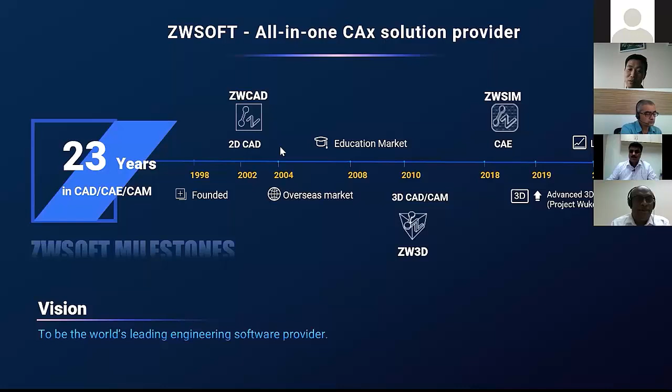This year is a very important year for ZWSOFT. We got our IPO successfully as the first listed and biggest engineering software provider in China. We are planning and working on some bigger and faster development steps after this year, like our new project called Wukong, which is related to BIM. I will share a little more information after this page.

So here I would like to show you some statistics of the ZWSOFT organization to give you an overview of our team. ZWSOFT is the biggest engineering software company in China, and also one of the few CAD/CAM/CAE providers with all technical kernel technology in the world. As an international company with headquarters in China, we now have 8 branch offices in China, the US, Vietnam, and more overseas local offices coming.

In total, we have more than 1,000 employees today, and I want you to pay attention to this: among our 1,000 employees, 50% of them are pure engineers from the R&D department. In total we have 6 R&D centers, 5 in China and 1 R&D center in the USA.

You can find from ZWSOFT's financial report that we keep spending more than 30% of our revenue on R&D every year. Such a high percentage of R&D spending is much higher than most other technology companies, even Huawei in China. That's also why we can keep improving good products and support to meet the needs and satisfaction of our customers, and of course you can also get good support.

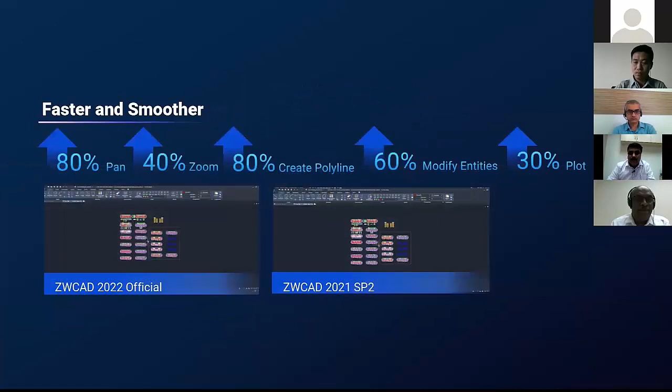Now let's look at a performance comparison between ZWCAD 2022 and ZWCAD 2021. You can see how much faster and smoother it is than before, for actions like zoom in, zoom out, creating polylines, modifying entities, and so on. The best way to experience the speed of ZWCAD is, for example, opening an existing file—you can see the difference significantly.

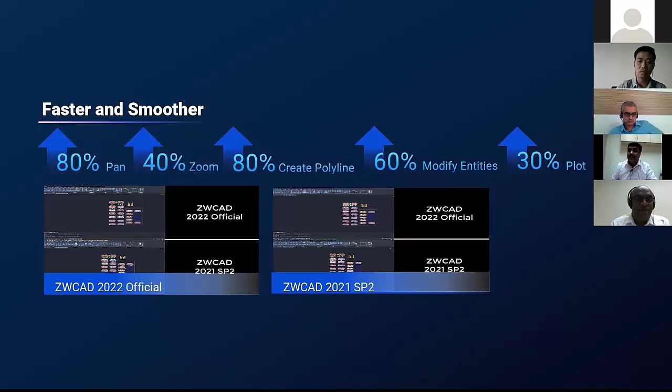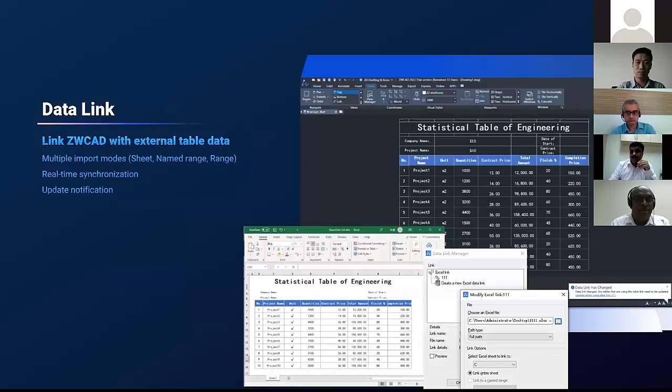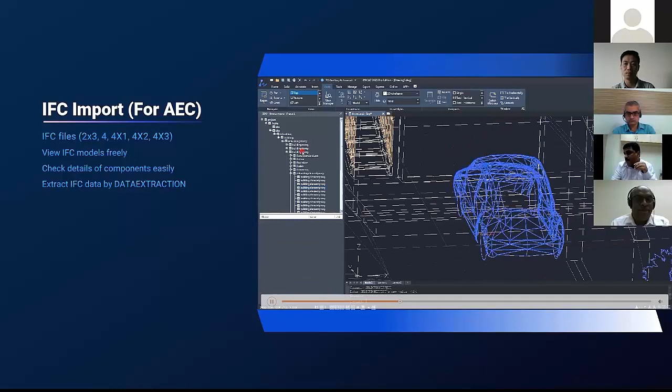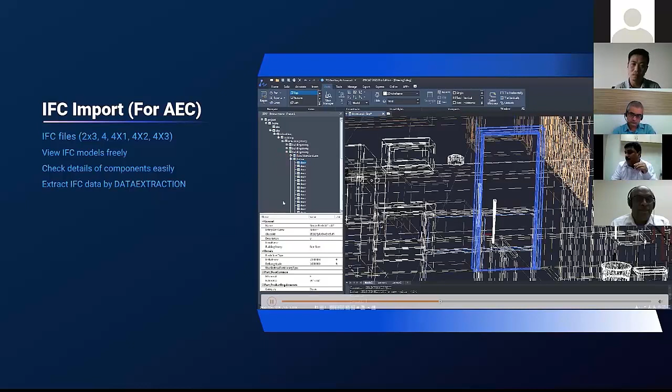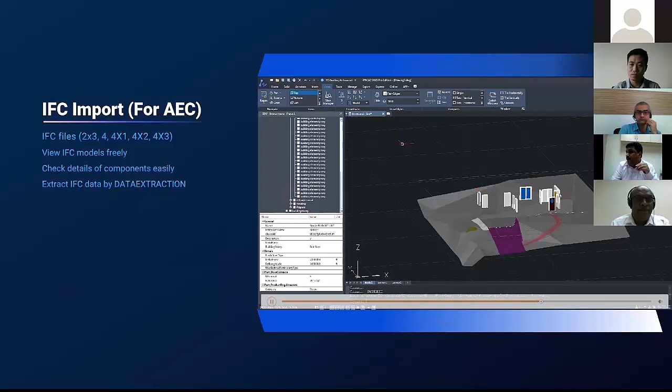Now let's look at data import, like IFC import, which is important in the BIM industry. You can import an IFC file and view the IFC data. In the IFC data, you can see full detail about the structure—what kind of details the IFC data has—all visible in the structural panel. You can identify building details and other IFC properties in the IFC structural panel, along with a whole bunch of product details. Next is visualization—once you import the IFC file, you can visualize all the details needed from the IFC data, and use this to cross-check your design.

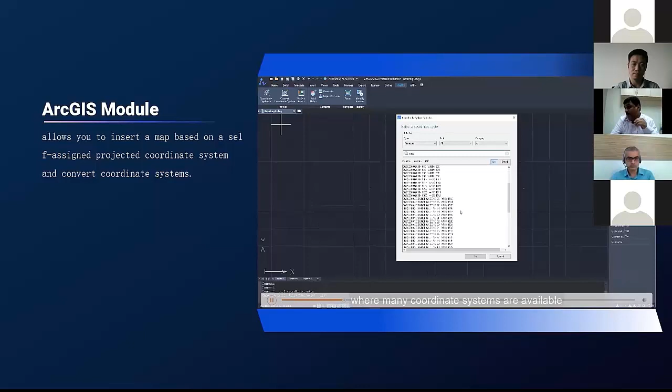Next is ArcGIS, an add-on module you can add in ZWCAD 2022 SP1. Here you can load your GIS data and convert it into the coordinate system properties. Let's see how you can assign the coordinate system in three different ways. First, you can assign the coordinate system using your existing references, selecting it as per your coordinate system value. Second, you can choose your project details in ArcGIS. Third, you can assign your current drawing using ArcGIS properties, and also assign the current drawing using ArcGIS data coordinate system.

Next is Flatshot. With Flatshot, you can convert a 3D model into a 2D drawing. For example, you can see the model from other views like top view and front view—you can take this data from the 3D model. This feature creates geometry from the 3D model using different axes, such as top view, front view, side view, and isometric view.

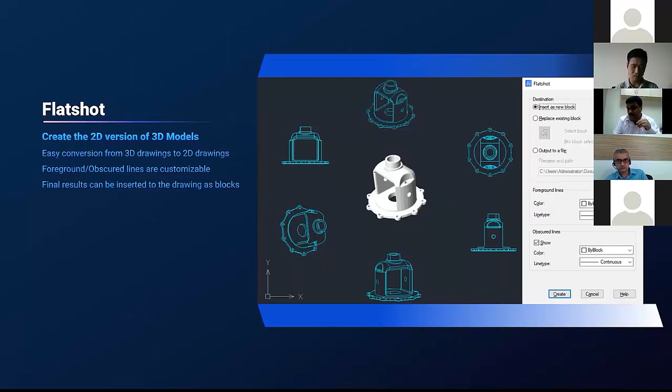Next is plot transparency, now available in ZWCAD 2022. If you want more varied graphic effects or a better representation of overlapping objects, don't miss this plot transparency feature.

Now come to the new licensing system. This is the window about the old licensing system, the 2021 license manager. In the new licensing system, there is the efficient license manager with added new user interface and more convenient way of activation, like offline activation using QR code. You can scan it offline through your mobile app, and you can manage all licenses in a single panel.

Next, the new features in ZWCAD. Adjustable viewport is convenient for viewport adjustment, and you can resize your viewports. And anti-aliasing switch is for smoothness of your curvature, which you can use in the option menu.

Then measure property. Measure property is a new tool. You can measure the distance, radius, area, and mass property. In one single command, you can measure a whole bunch of details.

Other improvements include plot transparency. You can apply plot transparency on your model space or while printing, so you can showcase the underneath design through the plot transparency. Updated data extraction: now text is added in the data extraction part. And mLeader: you can add mLeader in the right click menu, giving flexibility to add leaders. Then movable layer property: you can move your layer property side by side, or conveniently move whichever property you require.

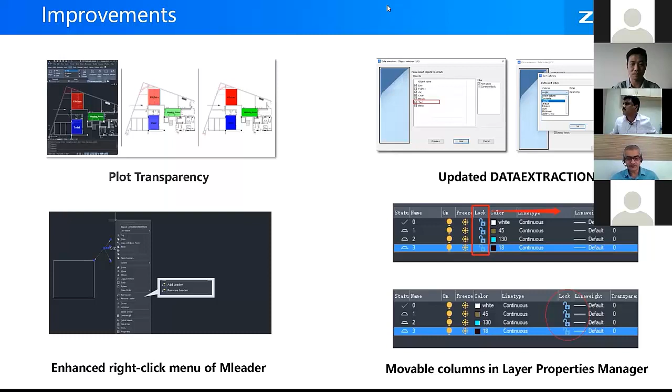Good afternoon everyone. My name is Rakesh Rao, and I am from Four Dimension Technologies. We are developers of add-on products for ZWCAD. We have produced many software like CADPower, GeoTools, and also done a lot of custom programming. So let me start with GeoTools today.

Let me just go to the screen. Are you able to see my screen? Yes. Yes, yes.

Okay, so this presentation is about a small add-on product called GeoTools, which runs on ZWCAD very efficiently. First of all, I would like to introduce and define what GeoTools is, and what the objective of this product is, because sometimes there is confusion. People don't know—geo obviously means geographic data, but beyond that they don't know whether it is geography, survey, or GIS.

So we define GeoTools as a geographic data productivity software. This means if you're using just ZWCAD, you may only have a certain number of general tools for your daily work, but with GeoTools we make it more easy and more productive. So primarily it's useful for anyone who is using geographic data, mainly industries like infrastructure, surveying, mapping, oil and gas, mining, civil, road design, facilities management, and so on.

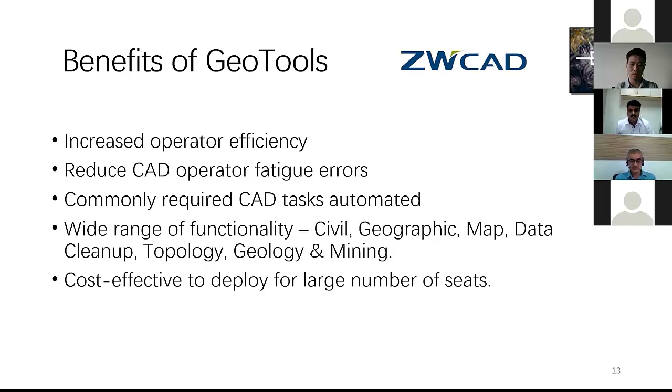Now these are some of the screenshots. I will be showing you 4 or 5 such screenshots, and then we move directly to the software live demo.

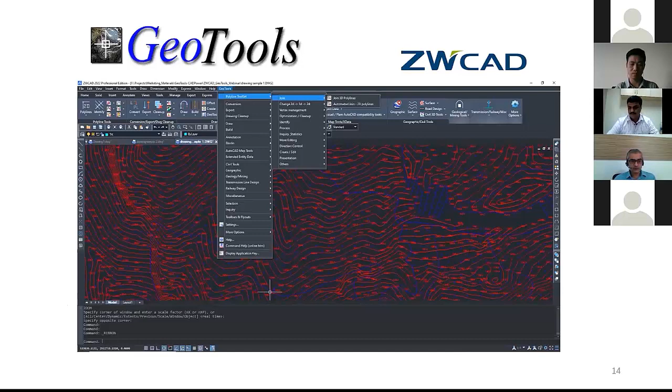Once you install GeoTools on ZWCAD, the GeoTools menu will appear at the end as a pull-down menu. It will also appear as a ribbon. It will also be accessible as a toolbar, and finally you can also run it from the command line. So all this I will show in the demo. Very easy to understand and use.

So you're seeing here the GeoTools Polyline toolset. The entire tools are classified into different categories. You can see already here Polyline, Conversion, Export, and so on. So for example, these are the conversion tools, and these are the export tools. These are annotation tools, civil tools.

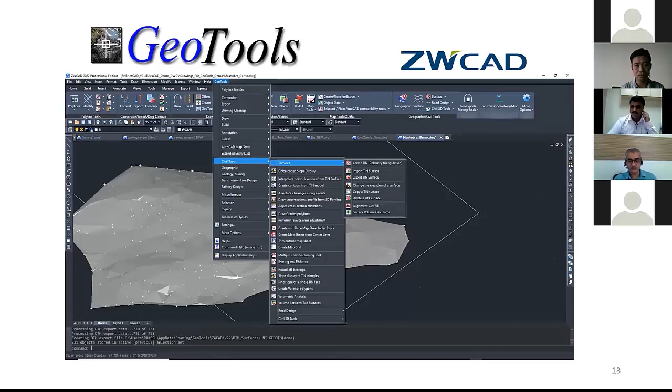Civil tools is probably the closest you can get to a software like Civil 3D. We have all the tools for contours, terrain modeling, slope analysis, color-coded maps, grading, polylines, trimming, sheet generation, all those things. So the tools can be classified both for design as well as for map generation and layout preparation and so on.

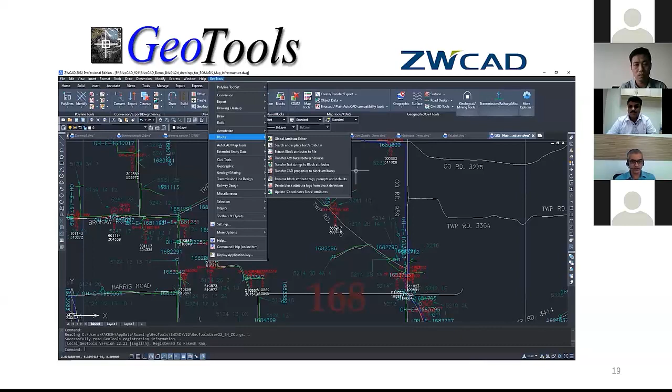Then we have tools for block management, like various advanced tools for attributes - globally modify the attributes, transfer attributes from one block to another, or transfer the data from polyline to attribute, attribute to polyline, and all that. Again, you will see that in the live demo.

Then here is the build tools, and then we have the draw tools here. And then we have a special section called geology and mining. This is an add-on to GeoTools. GeoTools itself is an add-on to ZWCAD. Geology and mining tools are a specific, separately priced add-on which are very useful for mining and geological consultants.

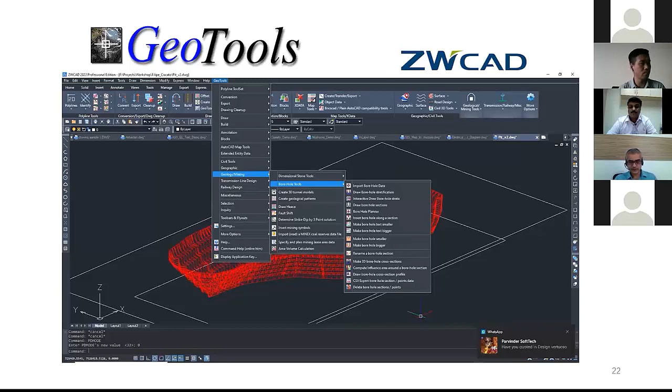Here we offer some of the basic functionality required by mining people, like creating boreholes, creating benches, creating rose diagrams and so on. I will also be briefly showing you that, just about maybe 1 minute, because this is only for a very specialized industry. So this is an example of output from the mining.

Okay, so that was the PPT. I don't want to show too much of PPT. It is better that we see the product live.

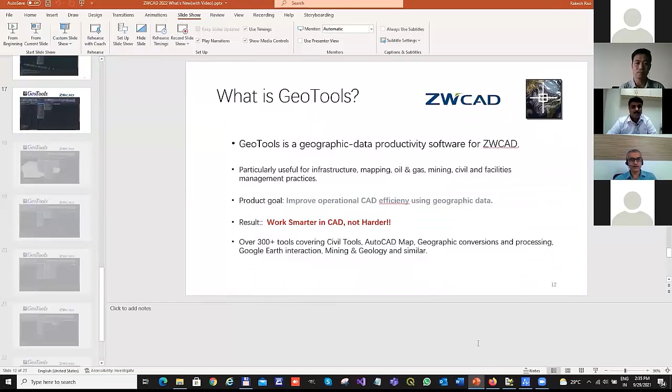Okay, how do I move this to the top? Yeah.

How do I move the zoom window to the top? It's blocking my toolbar. Yeah, I can see your screen now. Yes, we can hear you also. No, I'm trying to move it to the top. Okay, no problem, I'll just move it.

We can see now, yes, GeoTools is running on ZWCAD 2022. Got it. So this is how it looks.

Like I said, we have the GeoTools pull-down menu here, and under this we have different options like Polyline. So all the Polyline tools are shown here, and you can see they're very logically organized. Under Polyline tools, if you come to Join, we have Join 3D Polylines and Automated Join for 2D Polylines. And under Polyline, we have Change 2D to 3D, 3D to 2D, so here also you have different options.

I just clicked on one of them, and you can see if you want to convert a 3D polyline to 2D polyline, these are the different options, like change to 0, lowest Z, highest Z, and so on. What I mean to say is there are multiple options for each command which you can use.

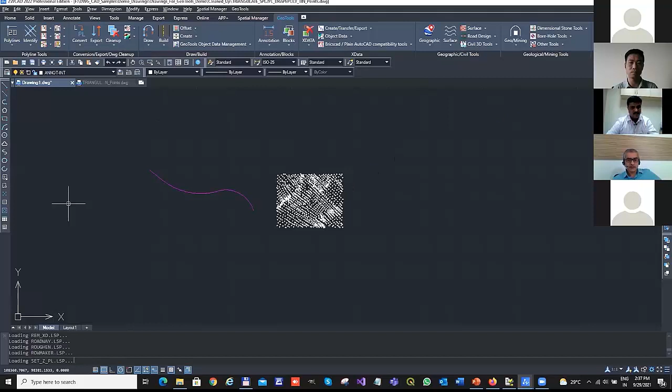So let me now open some drawings and show you how you can do this. For example, we're going to open this drawing here. I'm going to start with some basic civil tools. Right now here I have a set of points.

You can see these are a set of points, and I'm going to now create a 3D DTM, or digital terrain model, out of this. So I go to GeoTools, then Civil Tools, then Surfaces, and I create TIN. TIN is also known as Delaunay Triangulation.

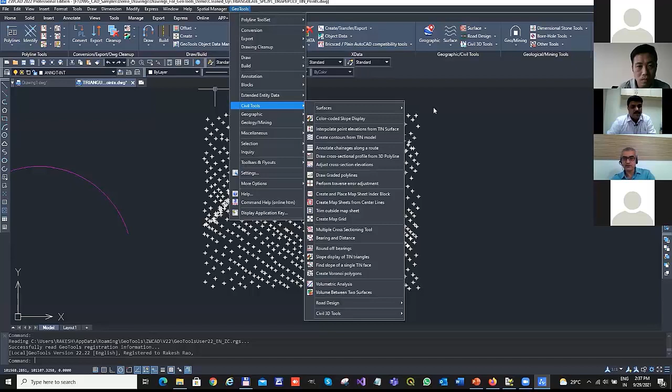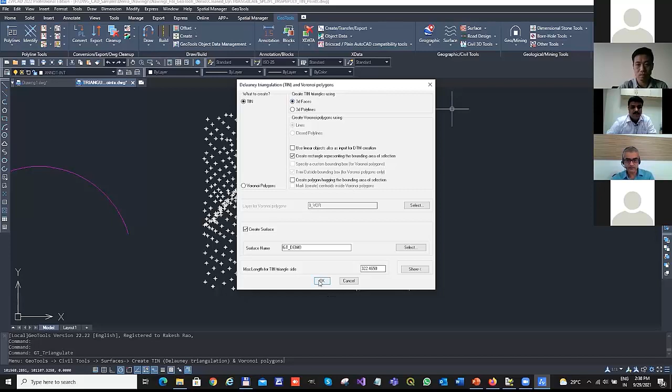If I click on this: what do you want to create, TIN or Voronoi polygons? Voronoi polygons are another type of GIS data representation, so we can do that as well. Right now I'm going to create TIN, and I can choose 3D faces as the objects, and I'll say OK. Then I'm going to select these points.

This is now going to process the points and create a TIN out of them. You can see already that the TIN has been created, and it has also exported the TIN to an external file, a GeoDTM file. The advantage is that you can always retrieve it on another computer, or share it with your customer, or do various things. So I have a TIN now.

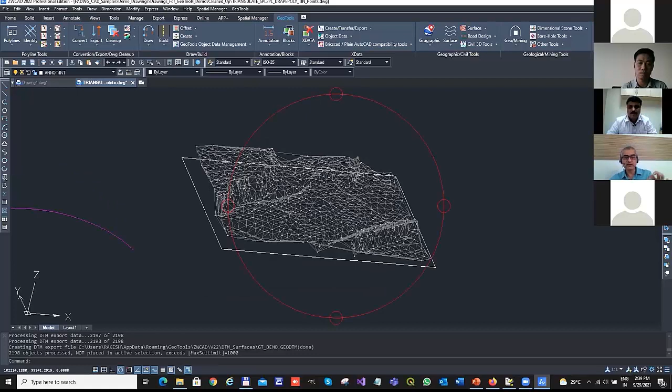If I move it in a different view angle, you can see that this TIN has got the elevations and all that. So this is a simple way how I have converted a set of points into a TIN. Now let us see something more.

I have here a spline, and this spline, for example, is my road alignment. I'm going to place this spline here on top of this TIN, and now I want to create a road alignment. I want to see how the road can be built.

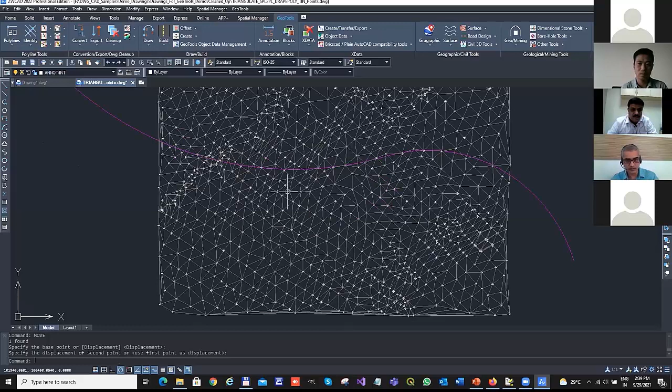Now to create an alignment, normally I require a polyline. Spline is not useful, because spline is good as a geometric curve, but for engineering design you need polyline and you need the points. So my first step will be to convert this spline into a polyline.

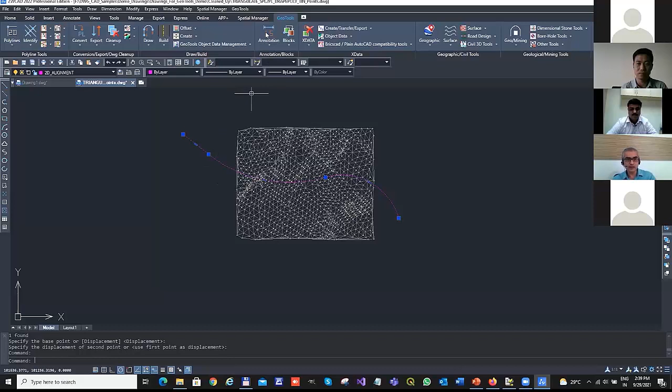That is available here under the conversion tool. If you go here under Conversion, there are so many conversion tools. Out of that, we are interested now in Convert Spline to Polyline. I'm going to click on this.

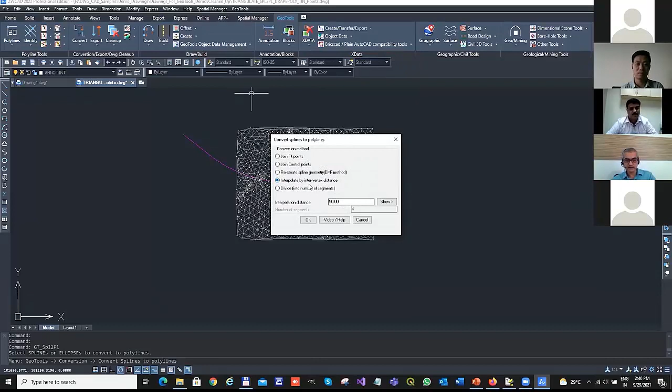I'm going to use this option called Interpolate by Intervertex Distance, with interpolation distance given as 50. I'll say OK, and I'm going to select this spline and say Apply. I have options to delete the original one and all those things, so I will say OK, don't delete.

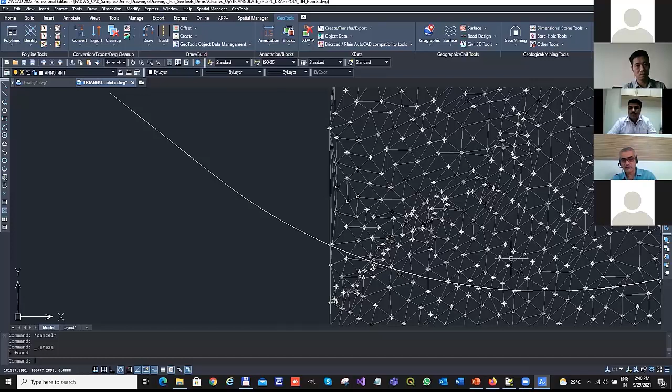Just for you to see, this is the original spline, and this is the one after converting it to polyline. This is a very useful tool because a lot of people spend so much time trying to convert a spline into a polyline. They may go manually digitizing, picking points one by one. But here, with an interpolation value of 50, we have created the polyline very easily.

Now next I'm going to convert this into a 3D polyline. Initially it was 2D, so I am converting this into 3D. But converting it into 3D doesn't mean it has got elevation, it only means that internally it is converted from a 2D polyline to 3D. So if you once again change the direction, you can see it is still in 2D only.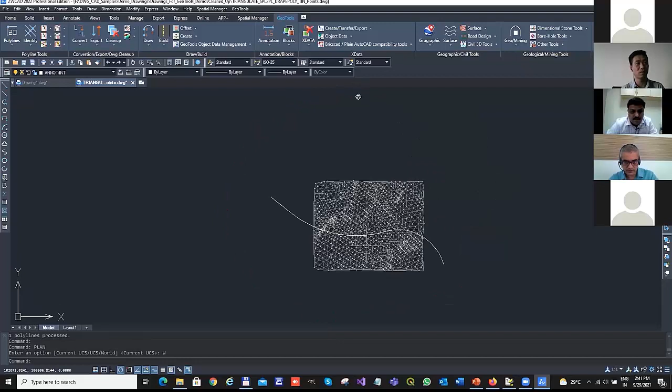So we will now see how we can use interpolation to make it 3D. I go to GeoTools, then Build, and I'm going to use a tool called Drape a 3D Polyline Across a Set of Intersecting Linear Objects. I click on this. What this tool does is convert this 2D polyline into a 3D polyline by interpolating the Z elevations.

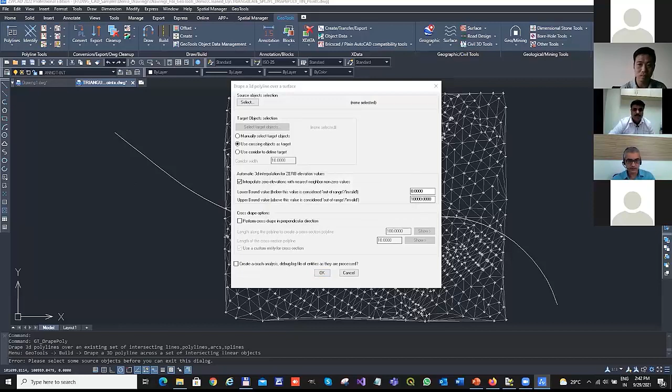So I'm going to click on this one. Say OK. So it is doing an interpolation of the DTM, and you can see 85 vertices added. So if you click here, you can see it has done the interpolation now.

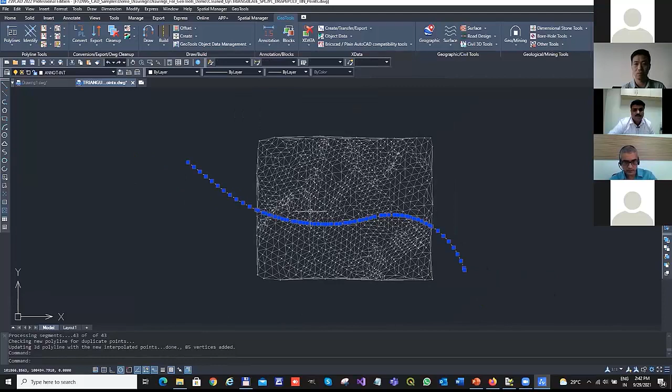So how do I prove it? You can see now that the polyline is exactly following the contours, exactly following the slope of this terrain. So this is how I have converted my 2D spline to a polyline. From polyline 2D polyline, I converted to 3D polyline, and then I have a 3D draped polyline. I've acquired the Z elevation.

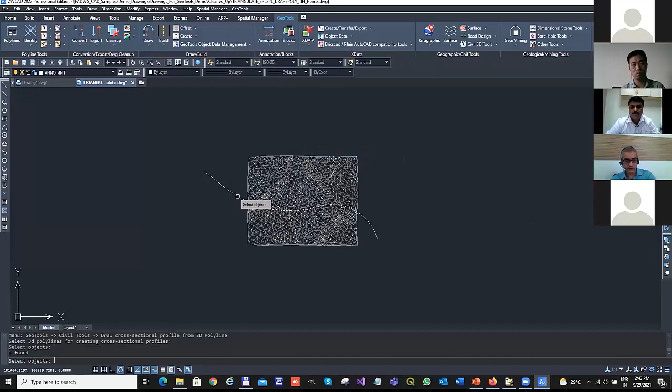So the last step, I'm going to go to Civil Tools, draw cross-section profile. I'm going to draw a cross-section profile for this one. You can see various options here: exaggeration factor, profile interval. This is very similar to what many people use Civil 3D for, and I know for sure that many people use Civil 3D just for this one function, which we already have in GeoTools.

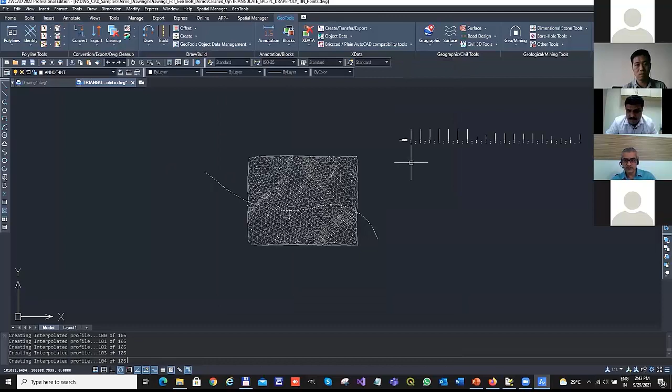For example, if you go to quick stats, it already tells you what is the minimum Z, maximum Z. So it is 244 to 344. I'm going to set my reference height as 240. So you can see I've generated the cross-section profile. It's very simple—with just GeoTools and ZWCAD, I've just picked this and generated the cross-section profile.

You can see there are different options here. I've used the interpolate option, but you can also use source, you can use both. And what you have seen now is only 10% of the command—there are so many different options available here. You can create the output exactly how you want it. So this is one workflow that I have shown you, which allows you to create a digital terrain model from land data and also convert that into a 3D profile.

Now, one other thing I want to highlight here, which will be one step before this actually—here under export, we have a tool called import export points and lines. I'm not going to show how to run this program because it's very simple and easy, but I just want to tell you that we have a powerful import-export module.

It can bring in formats like NE, Northing Easting, NEZ, PNE, all combinations. You can have all combinations of your data. You can either import them or export them. Now, if you come to import and click on options, again look at the options—create the points as points, points and text, blocks, or text, or whatever description you have; you can bring them as layer name or as point number in the current layer.

If you have blocks, you can, for example, if I choose block, then you can choose what block you want, you can select the block. These are the predefined blocks in ZWCAD, provided by GeoTools but available in ZWCAD here. If you have your own blocks, you can choose them here as well. There are now a large number of options available here—you can pretty much use it in exactly the way you want.

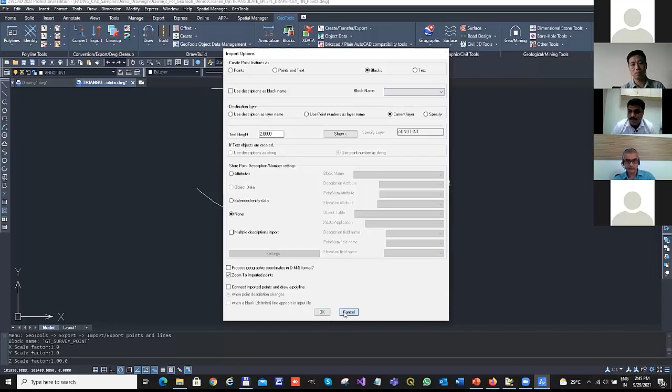So I can confidently tell you that we have covered a lot of functionality by taking real feedback from the users, because this product has been in the market for almost 22 years now. So it is very well tested and very well scoped also—it has got inputs taken from so many users across the world. So that is a tool for importing and exporting CSV files, so all your total station data can be imported with this one. Similarly, we have tools for importing ArcInfo, ArcView, DEM files, and so on.

Quickly under Polyline Tools, we have seen this. Under Vertex Management, you can see tools like Densify, Weed, Place Points, and all that—these are some of the cleanup tools. Again, more cleanup tools you can find here under this section. And there is a separate menu here where topology building tools are available, like Analyze and Fix, Polyline Elevation Trends, Linear Node Snap, and Lineworks Processor, and so on.

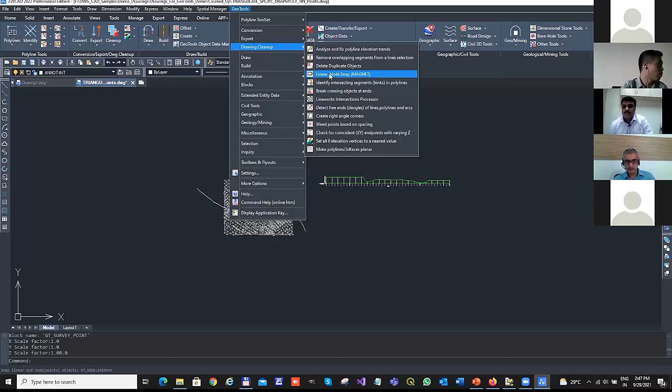So for example, if you go to Linear Node Snap, I just want to show you what it does. This is something that AutoCAD Map does quite well - various types of undershoots and overshoots cleanup, line to line snapping, line to node, node to line, node to node.

And so on. So if you are in the mapping or GIS data preparation industry, for example, if you are doing cadastral maps, or revenue boundaries, or irrigation parcel boundary, you will relate to all these tools very quickly. We have all of it available in GeoTools.

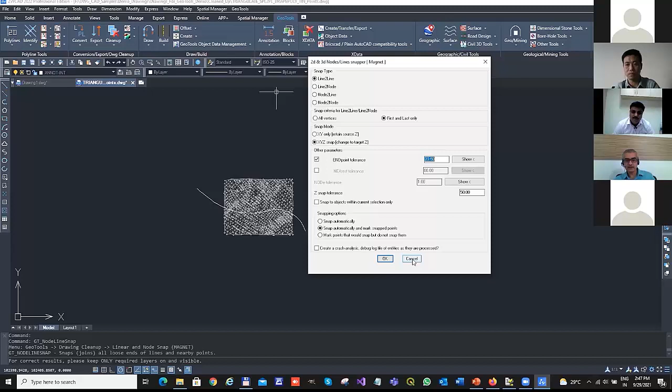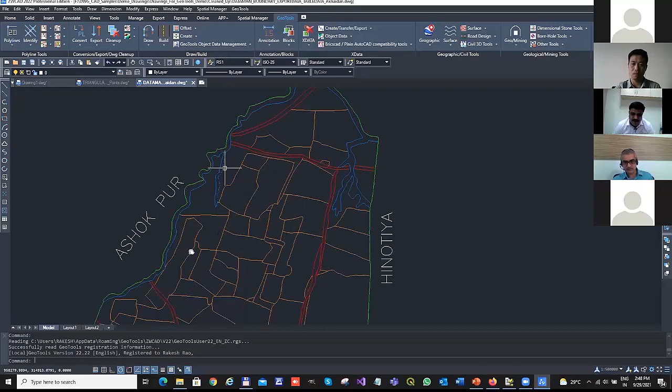Now let us move on to some other demo. So I'm going to open one more drawing here. This is an example of a small parcel map. It is actually real data by one of our customers, and we have just taken some information from them. We just show this small piece to you here.

Now here I want to show you a few things. The first thing is a functionality called Object Data Manager. So if you go to GeoTools, Object Data Manager, you can define object tables. I don't know how many of you are aware of it, but this is something AutoCAD Map does very well, and we have exactly the same functionality available for you in GeoTools.

So for example, I have created a table called parcel info. In this parcel info, I have three fields: area, owner, and year. Area is nothing but the area of the polygon. Owner is the name of the person owning the parcel. Year may be the year he purchased it. You can obviously add any number of fields you want - in this sample I've just added three.

Now, this object table data functionality is very useful. It will help you to convert your drawing into a database. And this functionality is not limited just to GIS users - we have found use for this even in the AEC or manufacturing industry.

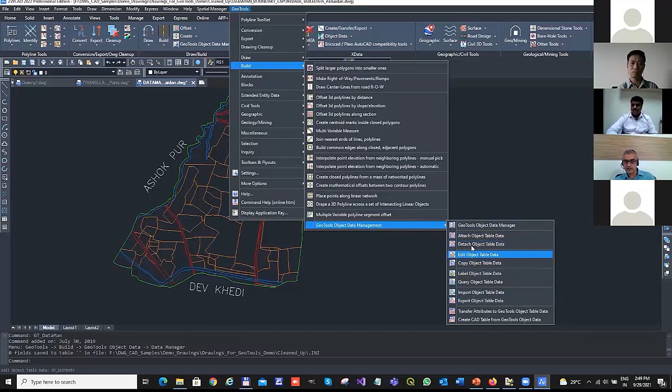Say for example, if you're in AEC, if you're an architect or engineer doing some normal designs, you can just create a database, tag it to your entity - maybe a parts database, maybe some other commercial database - add it to that. And we have all functionality here like query, attach, detach, label, and so on.

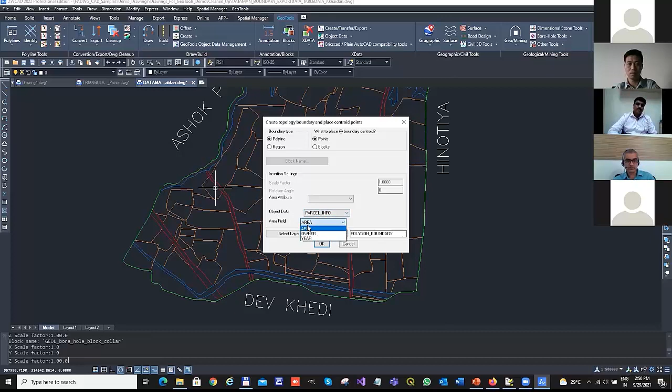Now, to show you in practice, what I will do is I'm going to use a command called boundary. So I'm going to create a polyline boundary, and here I'm going to use the same object table I have already created and choose this area attribute here. Now I'm going to just pick a point here.

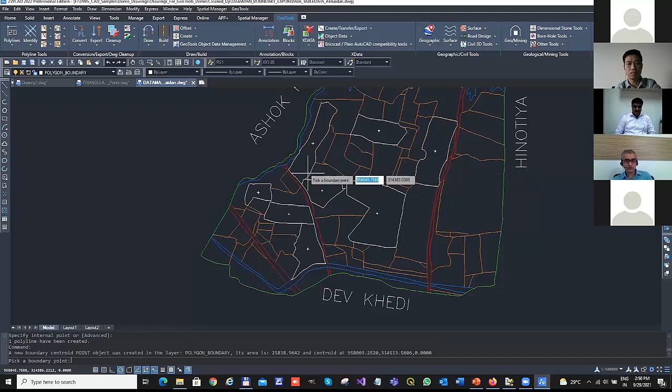Now you might be aware of the boundary command in ZWCAD, which is a very standard command for creating boundaries. So what our boundary command in GeoTools does is it packages it in such a way that it will give you the end result as you want.

See, this is my parcel map, and I want to create topological data so that finally I want to export this as maybe a CSV file. So I just picked a point here, and it says that a boundary point created, its area is so much, and its centroid is so much, and so on.

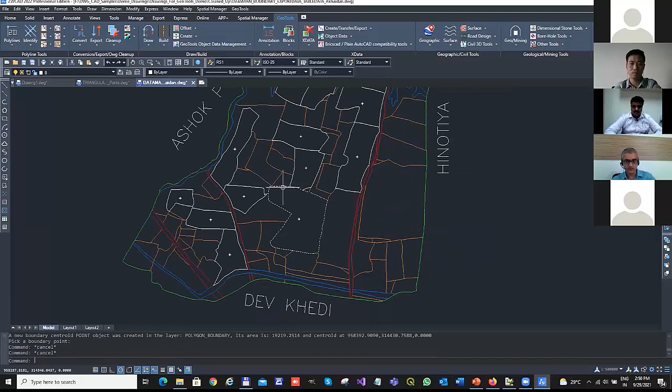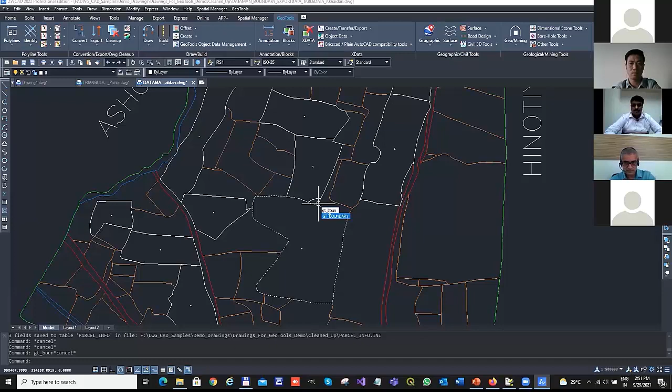So for example, if I click here, if I go to GeoTools, Build, Edit Object Table Data, I'm going to pick the centroid point. So I think it didn't take the data, so let me just add it. Let me just go once again. Yeah, so I pick a polyline, click here. Okay, so this way I can create my topologically correct boundary data.

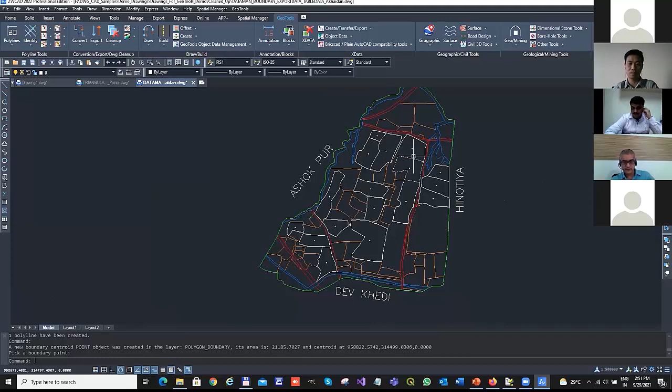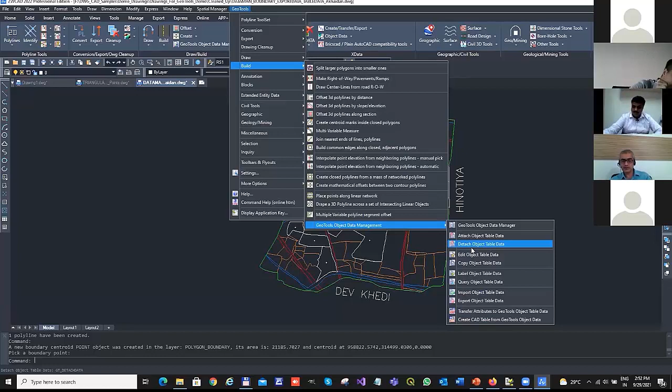So what else can I do with this? It is very powerful. You can also import this object table data from outside, or you can export it to a CSV file, or you can create a CAD table from your object table data. So there are a lot of things that you can do with the object table data - this is one of the topology building tools that is quite useful.

Now let us look at some annotation tools. So let me go here to this one.

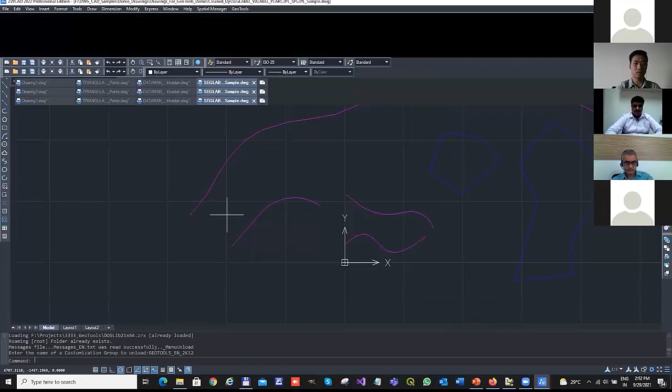Okay, so I have some polylines here, two polylines. I go to annotation tools. I have a command called label polyline segments. Here I can specify the label height. Say this much is my label height, about 45 is good. Outside polyline, I can select all the options, what type of labeling I want. So I'll just go here and pick this polyline.

You can see that it has labeled the polyline, even the arc segment has been labeled with the correct length and precision. Precision right now is taken as 4, but you can change it to whatever you want. Suppose you want 1 as precision, you can just select this and create

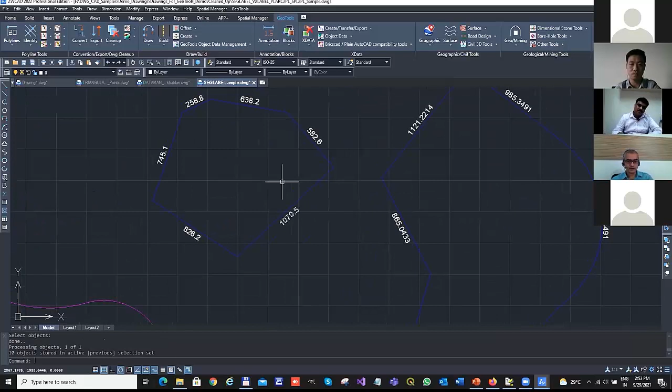the labeling outside. So similarly now, if I want to label this polyline, I can use the vertex labeling tool. So annotation, label polyline vertices. There are several annotation methods like X coordinate, Y coordinate, Z coordinate, X, Y and all. I'm going to use the cumulative slope distance method.

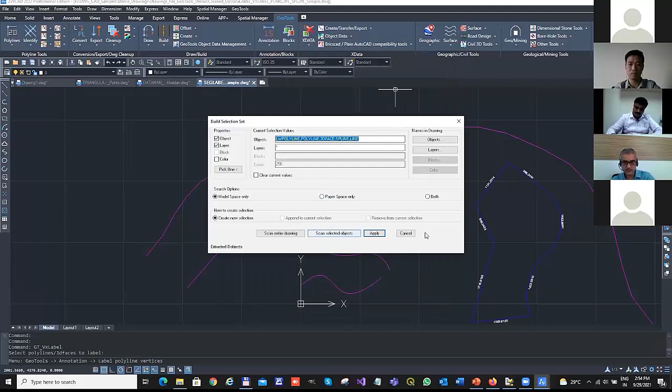So let's check the height. So much, yeah, that is good. Precision, let us make it 1. We don't want too high precision. So I'm going to pick this.

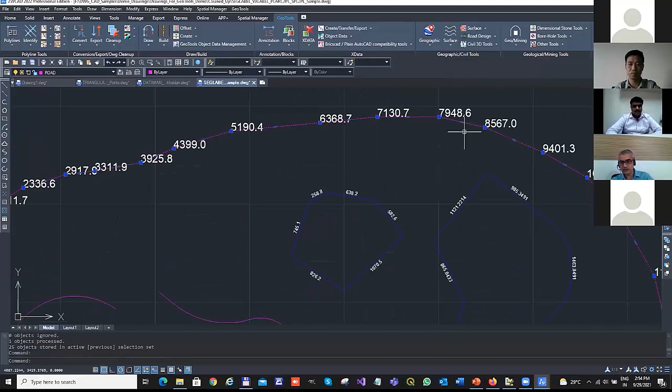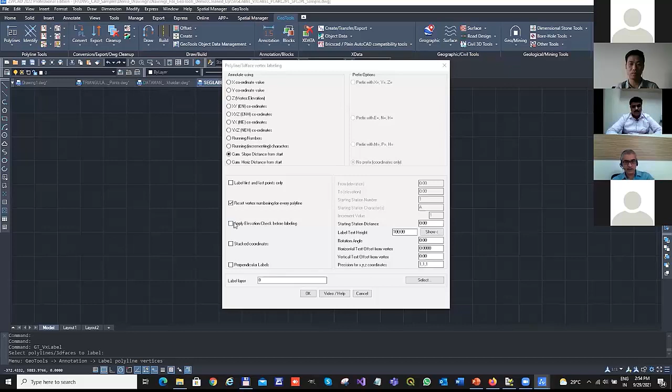You can see it has done the cumulative distance labeling along the vertex. For each vertex it has put the distance, and at the end it has put the total distance also as a perimeter. Now just realize that what I have shown you is just one type of output. You can change so many things like the text height, rotation angle, the offsets, the elevation checks, conditional labeling. So a lot of things you can change to create the output exactly how we want it.

Okay, so there are also tools for contour labeling. For example, if you come here, you can label the contours by elevation or curve length, at peak point or at midpoint, ends of curve and all that. So whatever common operations you want to do with your geographic data, like your TIN or your Google Earth or your contours, whatever - we have the solution for you in GeoTools.

So if you come to civil tools, you can see there are some tools for Google Earth. Under geographic tools, we have tools for bringing in Google Earth image, Google Earth point image, Google Earth image import, and so on. These are not internal tools, they are based on a very interactive method. So the accuracy is about 95 to 98%. I wouldn't say it is 100% accurate, but it will be more than enough

for rough sketches and making a quick analysis of your site. So similarly, we have rubber sheeting tool also available. Again, this is 95 to 98% accuracy, depending on how you click it and do it. So all this is possible. If any of you want some more information, we can always organize a one-on-one session, because these are all specific scripts that need to be prepared and customized for each user, and we can show in detail.

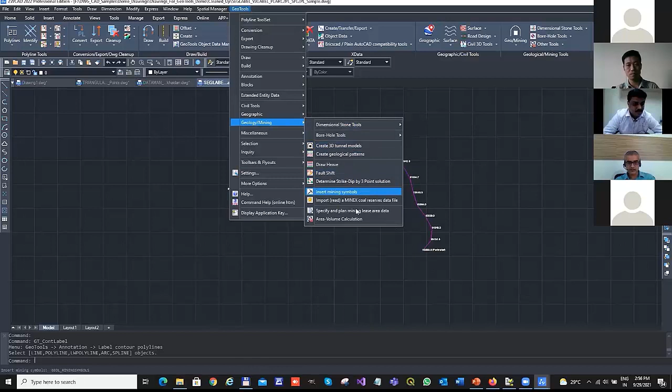Again, this is the geological and mining tool, already shown in the PPT. You can bring in the data in different ways you want it. We have data that you can bring as blocks, data you can bring as hatches, and your data will be stored in CSV files.

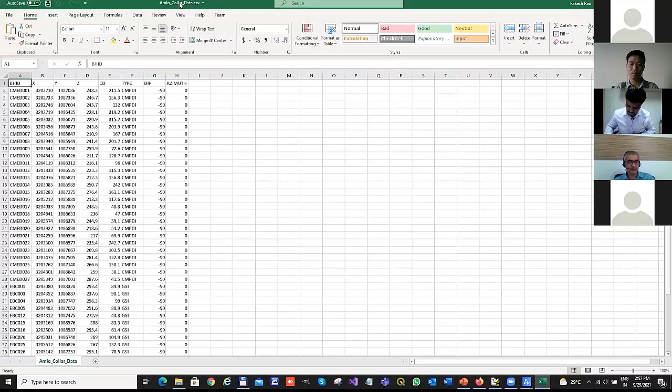Let me just show you an example. So this is a typical example of a mining collar file, called collar data, in CSV format. And this is a typical example of the borehole data. Now, what you see here, data is all organized in different columns.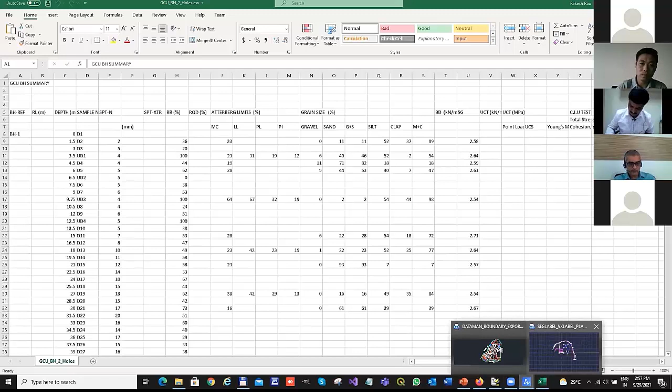And if you come to our program, if I go here to geological mining, this one, block, and say okay. Just give me a minute. Yeah, that's it. So you can see this is how the various inputs you have to give, the CSV file name, the columns, and all those things. And once you click on Draw 2D Section View or Attach data to bore holes, you can run it.

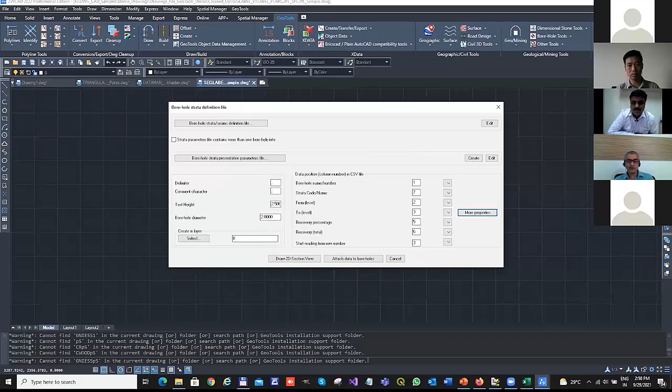Attach method. Here you can see from whatever you have in your CSV file, you can put the column number. All you need to do is make sure the column number is specified correctly. Similarly, if you go to more properties, you can specify additional properties also. Once your column numbers are put correctly, the data will come in correctly. So it doesn't matter how your CSV file is structured.

In GeoTools, any CSV file you use as input, whether it is survey data, mining data, or geographic data, as long as you specify the options correctly, your data can be imported in GeoTools.

Now, like I told you, you can call the commands from the command line also. If you just come to the command line and type GT, you can see all the GeoTools commands here. Some of the experts like to type the command directly from the command line. They can do it here.

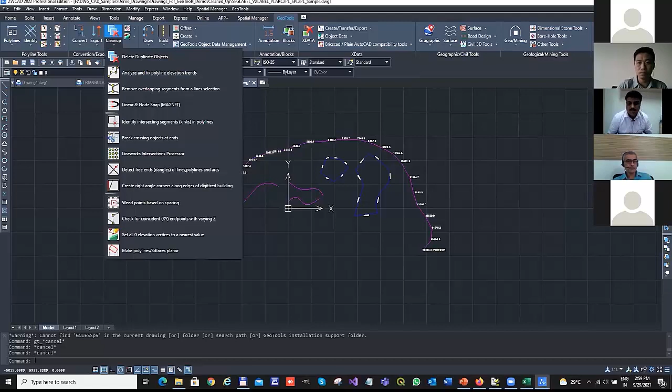Or like I said, it is through the pull down menu or the ribbon. So the ribbon is also very easily accessible, very user friendly. Once you start using it, you'll realize it's quite easy to operate. And the best part about GeoTools is its value for money.

So you can try it out, and I'm always available. Anytime you need my help, you can come to me and ask for specific information or anything. So that is the basic demo of GeoTools. I hope you all enjoyed and found it useful. Please feel free to ask any questions, I'll be happy to answer them for you.

Thank you very much, Rakesh Rao. You're welcome. So GeoTools looks powerful and perfect running on ZWCAD.

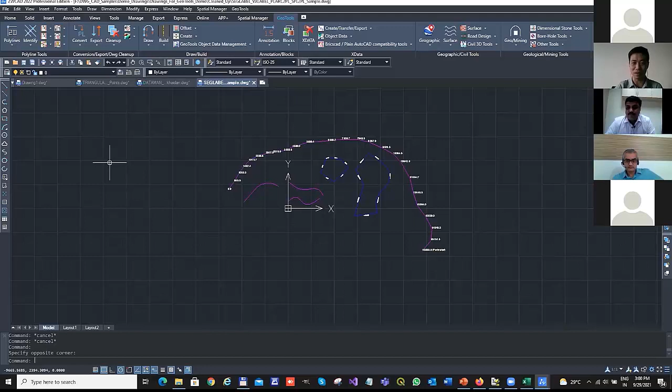Actually, I think it will meet many customers' needs, especially together with the new ArcGIS module. Yes, definitely, it is very useful. That is why I mentioned that let people come to us, then we will be able to give them more information, because in this 20 minutes this is the maximum I can tell. But we can always take it to the next level by engaging with the customer one-on-one.

So I request all of the attendees to do so. I think we have a question from Mr. Sendroy. Can you help to answer in the chat box? I'm sorry, where is the question? I didn't see it. He's asking, do we have R2V tools?

No, we don't have raster to vector conversion tools, because if you look at any of the standard products in the market, there was Autodesk Raster Design, and so many companies have come up with those. To be very honest, R2V is still not a very mature technology. It doesn't convert properly, and even after converting there's a lot of cleaning to do. R2V is a very delicate subject, it's not very easy to do, so it's not there in GeoTools.

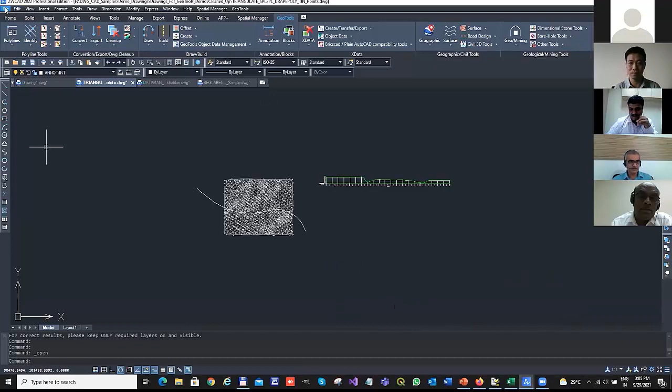Just for one minute, I will show you how Spatial Manager works, the basic stuff. So what you need to do is open a blank drawing if you want to just get the world map. Otherwise, you need to have a drawing with the geolocation already done.

Spatial Manager can also do geolocation, by the way. So here, if you go to show, it will ask you what type of data service you want to use. I'm going to use, for example, Google Maps. I'll say OK. Once you do that, it should now come up with the map.

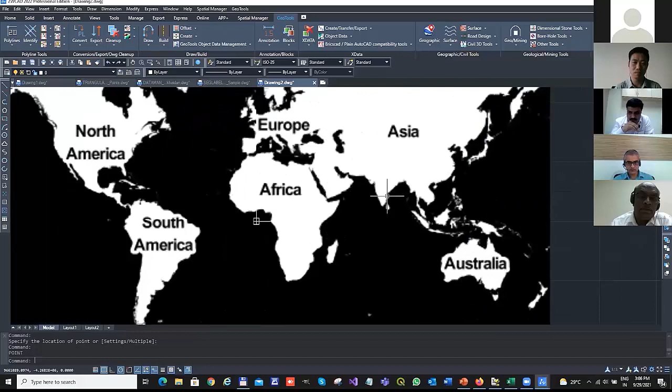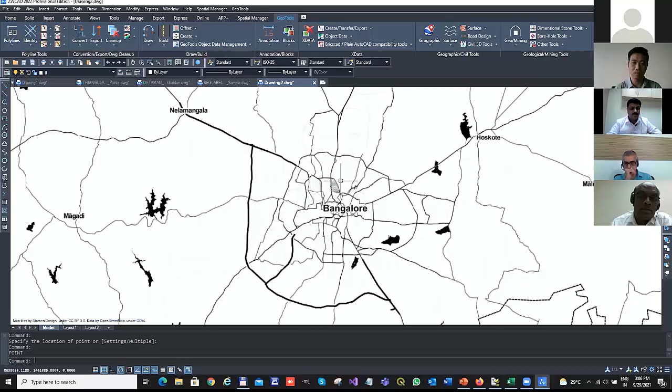It's in black and white. So if you zoom in now, you can see that Spatial Manager will bring in the data from Google Maps and display it here. I think it's in black and white, so let me just show it.

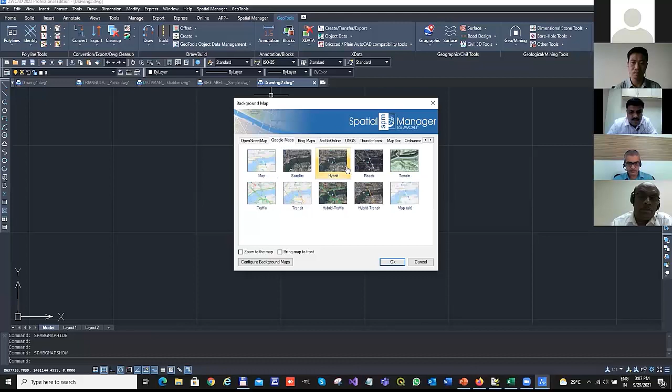Okay, sorry, I think I used some other map earlier. So Google Map is here, then we go to hybrid. Yeah, now it's correct.

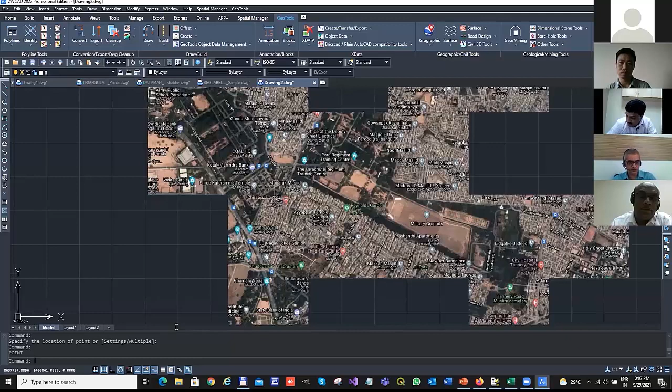So this is one of the most common uses for Spatial Manager. You'll be able to use your ZWCAD as a live Google Earth to bring in the data, and whatever coordinates you're seeing here, say for example if you do an ID, these are the actual UTM coordinates of the place.

Yes, so this is one important thing in Spatial Manager. The other important thing is if you go to import, you can import a wide variety of formats, like GPX, KML, SHP, SQLite, XYZ, and all that. So the two important functions of Spatial Manager on ZWCAD are to either import shape data, SHP files, or to import KML files and so on.

So these are useful. Then the third important use, I would say, is you can go to terrain. Yeah, go to terrain, and you can use these terrain functions to get elevations of any part of the world. You can bring it into ZWCAD, create contours, create a terrain model, and so on.

And it has got a number of basic GIS functionality also, like buffer, overlay, dissolve, centroids, and all of that. But I think it's a good software for its price point. So we are selling the Spatial Manager here in India for roughly $600 to $700. It's quite a good buy at that price.

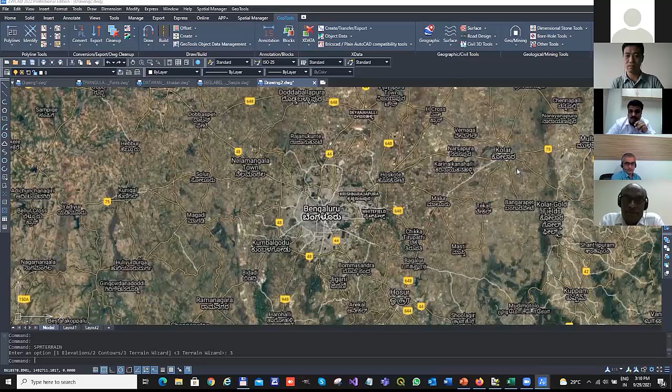Will it support both 32 and 64-bit? You mean ZWCAD, of course we support. No, both GeoTools. GeoTools will support anything that ZWCAD supports because it is an add-on. So we don't have any supporting rules from our side. Whatever, if ZWCAD runs, GeoTools also runs. Did I answer the question? So it runs, answer is yes.